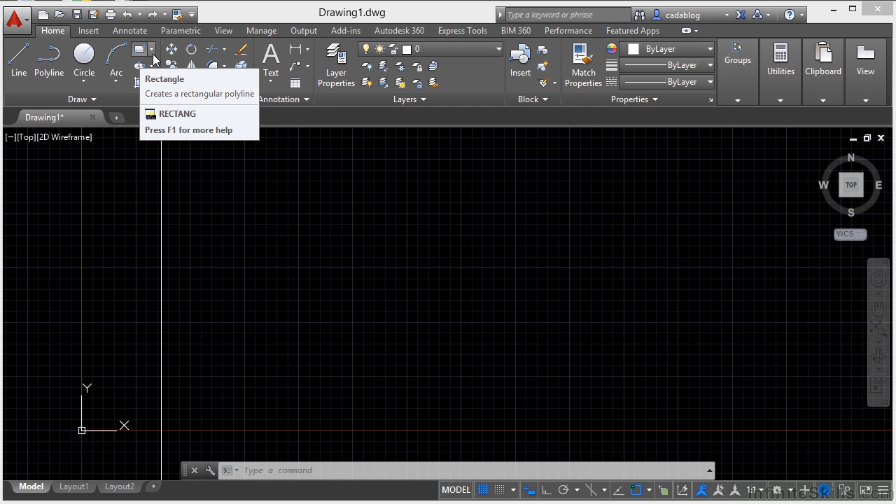Each tab has a panel. The panels contain the commands and tools that you're going to use. Panels, like the tabs, are grouped by similar commands. For example, the Draw panel here in the Home tab has the commands you need to draw lines, polylines, arcs, circles. As you can see, the line command, polyline, circle, arc, rectangle, center ellipses, and other items. If you look at the Annotation panel, you'll see you can create dimensions, leaders, tables, and text.

To switch between tabs, you click the tab that you want to work in. So click Insert, then click on the Insert button to use the Insert command.

If you aren't sure which command icon is for which command, just hover over it. This will pop up a balloon called a tooltip. If you hold it there a little longer, an expanded tooltip will show up, giving you more information about that command, tool, or setting. These are very handy, especially when you're first learning to use AutoCAD. The tooltips will give you the name of the command and a short description of it.

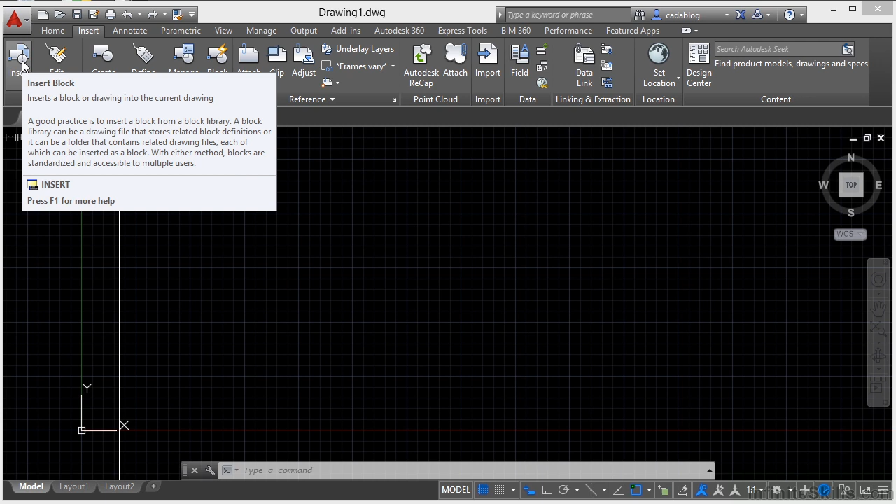If you want to learn more about the command, there is a link inside a lot of the tooltips to get you to the help screen. Or, as you hover over any one of these tools, press the F1 key to bring up the help system for that specific command.

Some of the panels collapse, meaning they shrink so as to give you more room on your screen. If I go to the Home tab, you can see a lot of these are shrunk down - the groups, utilities, clipboard, and view. As I hover over them, they will pop out and expand, showing us exactly what's in that panel.

To activate a command, you simply go to the tab and then to the panel that you want, hover over the icon, and then left-click on it.

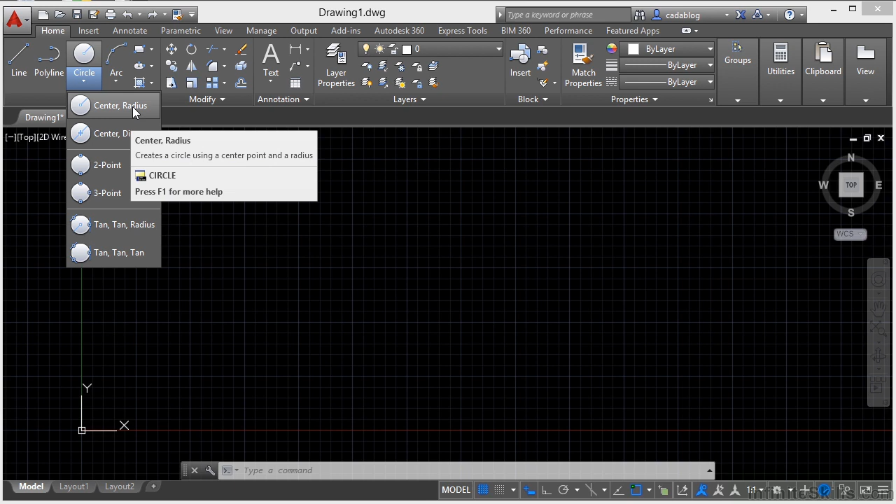Now, some of the commands, like the circle command, have fly-out icons. You can tell because there's a little arrow here. Arc has one, and these commands have one as well for the rectangle, for the ellipse, and for hatching. To access the flyouts, you just click the arrow and another window will pop up showing you the other options for that command. There are a lot of different ways to draw a circle, and these different commands in the flyout give you the ability to draw a circle in that way.

Same way with an arc, or with a rectangle, or a polygon. Now, the rectangle and polygon aren't flyouts for that specific command, but they are flyouts for similar commands that you might want to use. This is done because you don't always need the polygon command, but yet you want it, and you want to be able to get to it quickly this way, and it saves some room.

Now, some of the panels have style managers. For example, if I go to the Annotate tab, and I go to the text, or the dimensions, or the leaders, you'll see this little diagonal arrow in the bottom right-hand corner. This is the style manager for your text, for your dimensions, for your leaders, for your tables. So if I left-click on that, it will open up the text style manager.

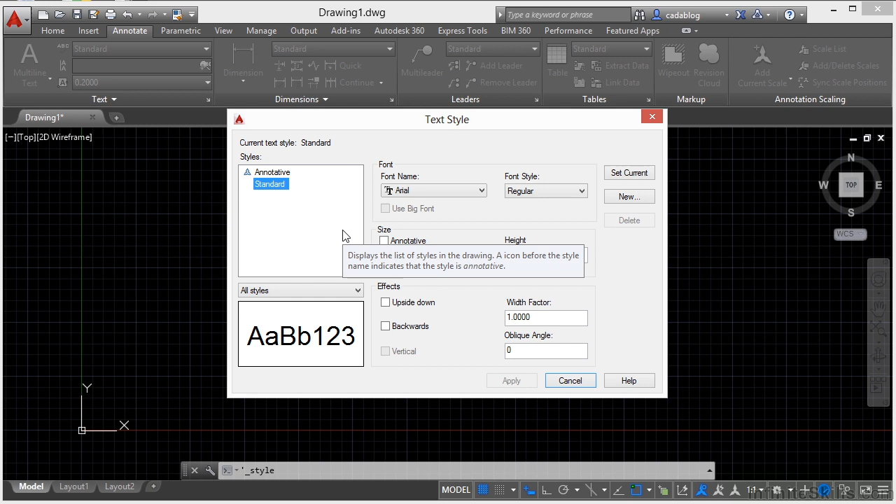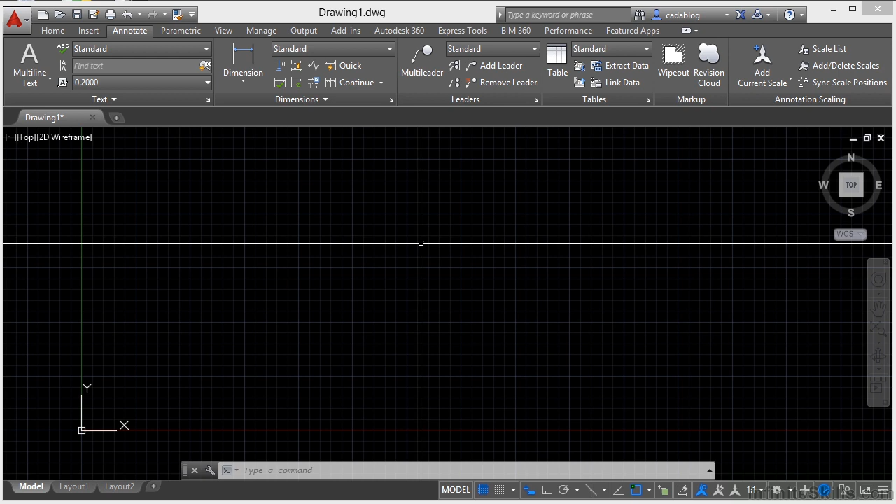Now there is another type of tab that will show up in the ribbon from time to time, and they are called contextual tabs. These tabs are not accessible at the moment, but they will show up when a certain command is activated. These tabs will contain tools that you will not need or be able to use during your normal working conditions, but the contextual tabs have tools in them that you will need in special cases.

One example is the Hatch tool. So if I go to the Home tab and I want to create a hatch, click on the Hatch command, and this will bring up the contextual tab for hatches. As you can see, it pops up. It's kind of highlighted in blue right now, so it tells you, hey, this is where it is.

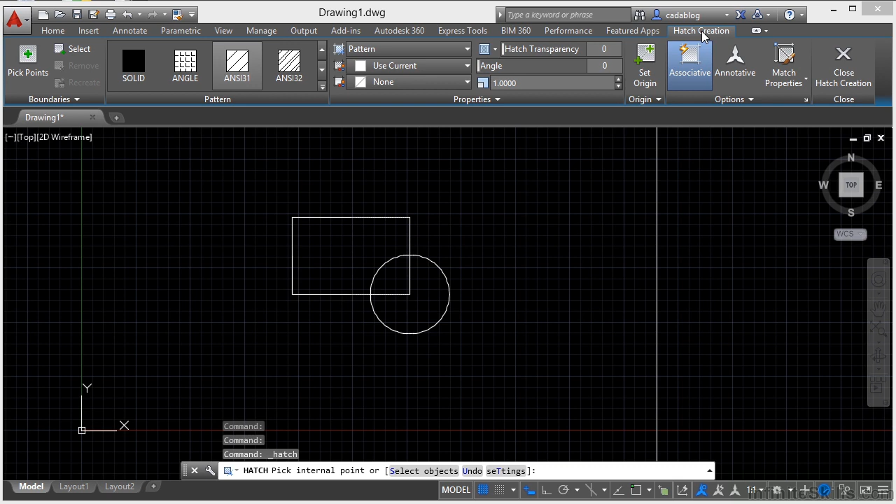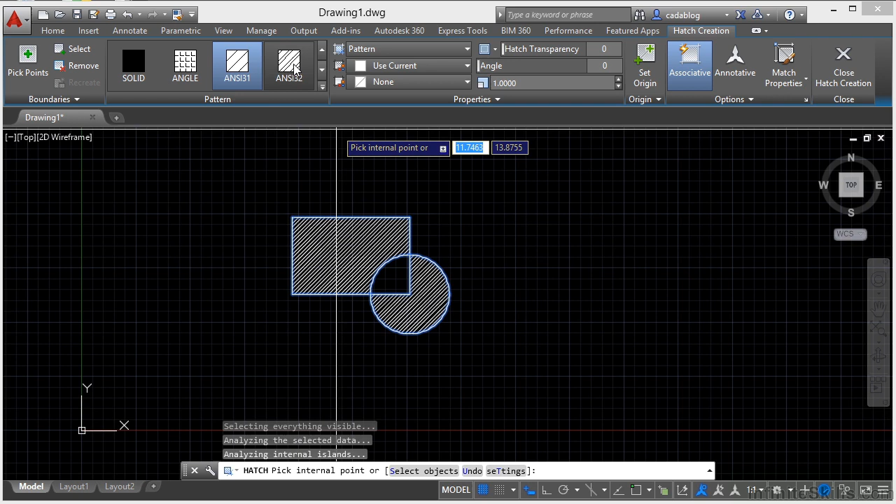Now I can go to one of these other tabs if I want to, and it's going to remain up here until I cancel out the command. This gives me all the tools and settings and options that I need to create a hatch. I can also manipulate the hatch as it's already started, changing some of the things in it if I'd like, or going on and creating a new one.

Once you finish your command, that contextual tab will go away. As we come across these contextual ribbon tabs throughout the video, I'll make sure to point them out to you.